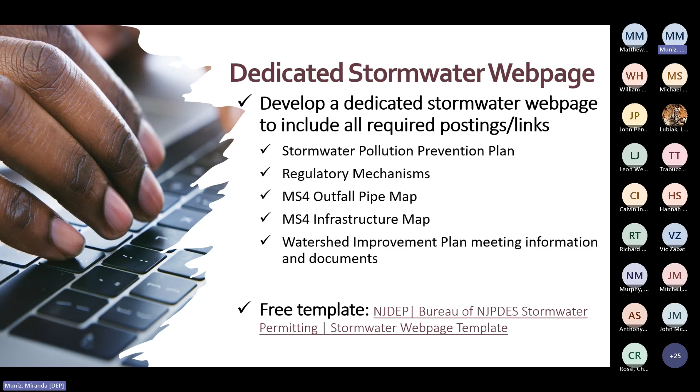Local public education and outreach. The SPC will arrange for a variety of education and outreach to the public. This is required for all permittees, not just those that operate rest areas. For highway agency permittees, we are using a 7-point system where you select at least 3 activities from the categories we describe in the permit attachment.

One activity must educate on the hazards of illicit connections and improper disposal of waste. Alternative activities can also count for this requirement as long as department approval is received prior to conducting the activity. Keep records of your activities and report them in your annual report. If you need ideas or materials, we have some available on the MS4 webpage that you can use.

Here are some highlights of Attachment A, the point system for public education and outreach activities. Here are some of the examples of activities we offer for points: designated pet relief areas, promotional item giveaway, regulatory mechanism signage, regulatory mechanism education, storm drain labeling campaign, litter cleanup campaign, report excess road salt pile program, and road salt education campaign. You can find a description of each activity as well as their associated point values in Attachment A in the permit.

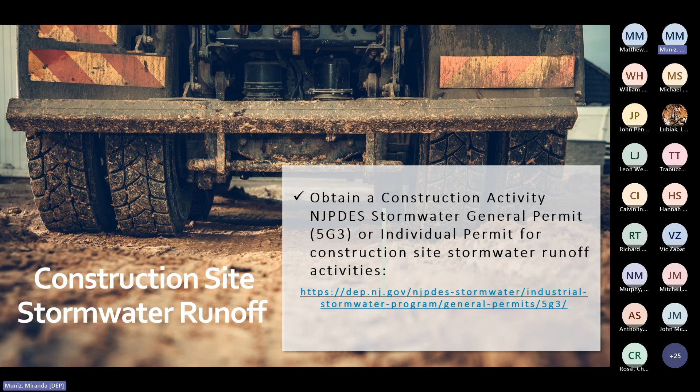Construction site stormwater runoff. The SPC must ensure that all construction projects that will disturb 1 acre or more, or are part of a common plan of development that disturbs 1 acre or more, obtain a 5G3 or an individual industrial stormwater permit before starting construction. Please note that the 5G3 permit was renewed in 2022 with minor changes. It applies to the projects undertaken by the permittee, as well as private companies and individuals.

Post-construction stormwater management in new development and redevelopment. This condition highlights the requirements related to stormwater management designs for major development projects. If you are the SPC but not the engineer, you won't need to know the technical details, but you do need to be familiar with the process. Engineers who review and approve major development projects must be different from those who design the projects. They can work at the same firm if that's something you outsource, but the person who designs the stormwater management project must be someone different than the person who reviews the design.

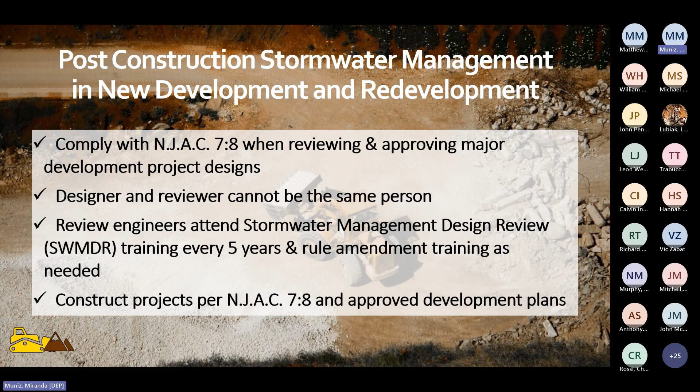Review engineers must complete the department's Stormwater Management Design Review, or SWMDR, course every 5 years to stay certified. They also need to attend a training on rule amendments if the department determines that training is warranted. We'll talk more about this when we get to the training section. You can check our webpage for the list of department certified engineers to confirm the status of the engineer for your facility. The reviewer must ensure that the projects are designed in accordance with N.J.A.C. 7:8, the BMP manual, and constructed according to the approved plans.

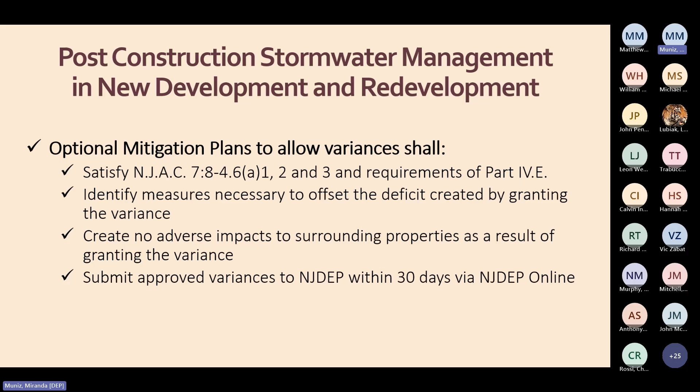Mitigation plans. If your facility wants the ability to grant variances from the design and performance standards for stormwater management measures, there needs to be a written mitigation plan that satisfies the criteria in the stormwater management rules at N.J.A.C. 7:8-4.6(a)1, 2 and 3 and identifies the measures necessary to offset the deficit created by granting the variance. Each time your agency grants a variance, you need to send a report describing the variance to the department via NJDEP Online within 30 days of the approval.

Regulatory mechanisms. Regulatory mechanisms are aimed at minimizing stormwater pollution and flooding throughout the highway agency properties, not just at major development sites. The purpose of community-wide regulatory mechanisms is to have methods in place to keep pollutants out of stormwater so it doesn't make its way to streams, lakes, and other water bodies where it can contribute to harmful algal blooms, or HABs, cause beach closings, and a host of other negative impacts. They help to keep the community clean by setting a standard for the public and ensure you have a way to punish those who violate these regulatory mechanisms.

Let's go through each regulatory mechanism briefly. Pet waste: the intent is to get people to clean up after their pets so their waste stays out of the stormwater system and ultimately out of the watershed. Highway agencies can also use this mechanism to completely prohibit pets from being allowed on highway agency property.

Wildlife feeding: the intent is to stop people from feeding wildlife, like ducks and geese, to discourage them from gathering where they can leave droppings on public property that also pollute the watershed.

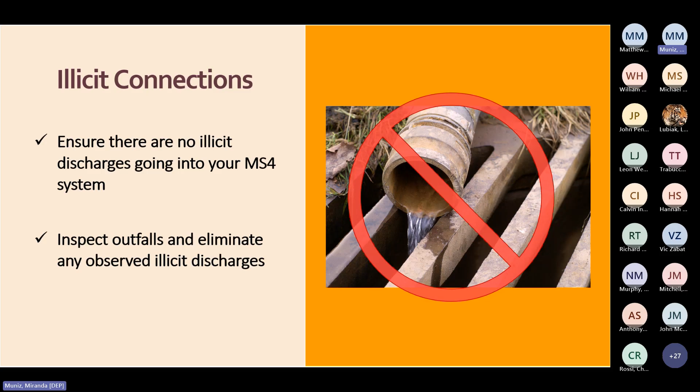Litter pickup program: all permittees must develop a litter pickup program that includes roadside cleanup of trash and debris and regular collection of refuse from litter and recycling receptacles, including those located at rest areas. You must maintain records of roadside cleanups and estimates of the total amount of trash and debris collected.

Sweeping streets provides more than just aesthetic benefits. It keeps dirt, debris, and litter out of the stormwater system where it would otherwise pollute the watershed. It helps alleviate flooding from clogged storm drains and can help reduce the frequency of catch basin cleanings.

This requirement was not changed from the last permit. You are only responsible for sweeping your roadways that you own and operate. While these are the minimum requirements, the permittee must sweep more frequently as necessary to eliminate recurring problems.

First, we have quarterly street sweeping. The permittee shall sweep, at a minimum, once every 3 months, all segments of limited access highways, including ramps and parking areas, that have storm drain inlets or discharge directly to surface water.

Triannual street sweeping: the permittee shall sweep, at a minimum, once every 4 months, all segments of streets, ramps, and parking areas that have storm drain inlets or discharge directly to surface water, but are not limited access highways.

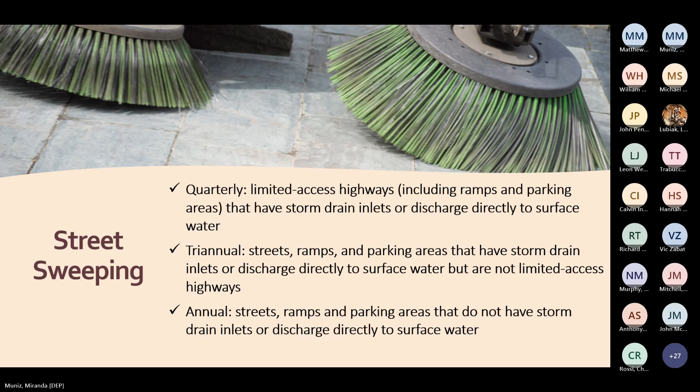On the left, we have a photo of a rest area parking lot with inlets that discharge directly to surface water, which needs to be swept 3 times a year under the highway agency permit. On the right, we have a photo of a limited access highway, which needs to be swept 4 times a year under the HA permit.

Streets, ramps, and parking areas that are owned or operated by the permittee but do not have storm drain inlets or discharge directly to surface water only need to be swept annually.

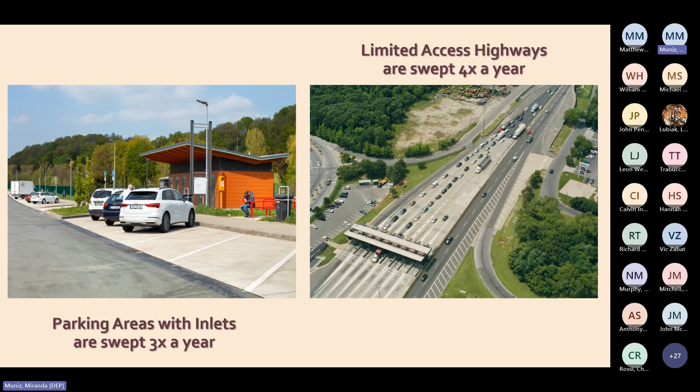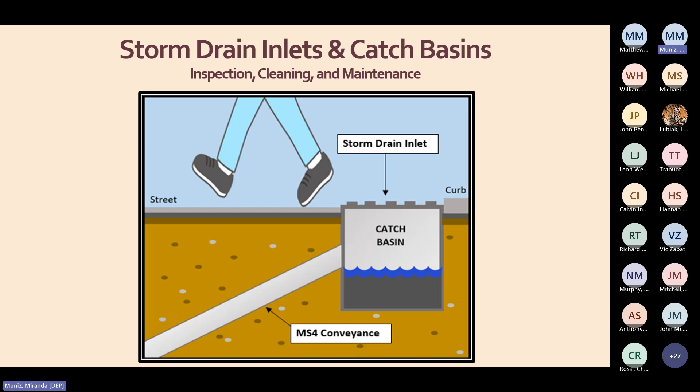Let's talk about the difference between storm drain inlets and catch basins. The storm drain inlet is the top grate that you can walk or drive over, and if it's along a curb, it includes that curbside opening. We consider the inlet to be the parts that you can see on the surface. The catch basin is below the surface, typically straight below the inlet, but sometimes further down the pipe.

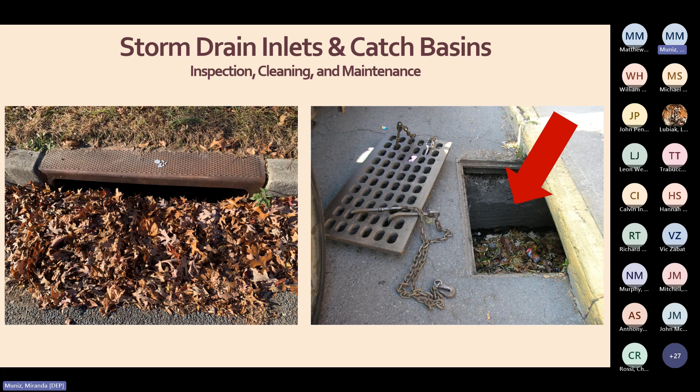New storm drain installations must have a corresponding catch basin or other BMP designed for solids collection. It can be directly below the inlet or downstream of the new storm drain inlet prior to discharge to surface water. Exemptions for this condition include storm drains built on bridges or culverts, or when additional hydraulic losses will result in unavoidable adverse hydraulic impacts.

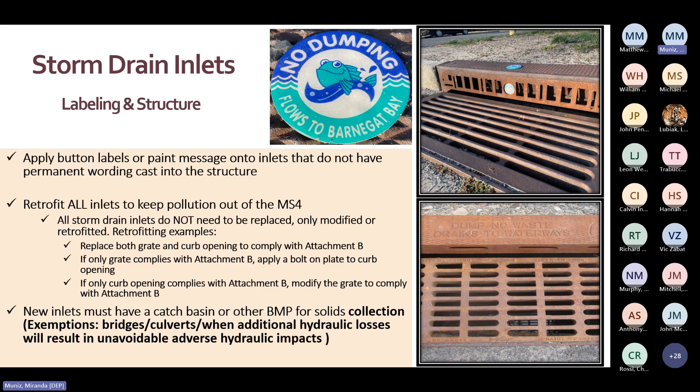So that's everything you need to know about the structure. Let's talk about inspections and maintenance for storm drain inlets. These inspections can be done by driving to each inlet and just hopping out of the truck to check if trash, leaves, branches, or other debris need to be removed, or if you see signs of damage. For this reason, we require that all permittees inspect all storm drain inlets every year.

Catch basins involve a bit more work. The inspector needs to get out of the truck, look down inside with a flashlight, or maybe lift the inlet grate to see if the catch basin needs cleaning. If the highway agency operates or maintains more than 2,500 catch basins, the requirement is to inspect a minimum of 20% of the total every year on rotation, so that all catch basins are inspected by the end of the permit cycle. If the highway agency operates or maintains less than 2,500 catch basins, they must all be inspected annually.

When it comes to catch basin cleaning, please check the manufacturer's recommendations. The EPA also has a guidance document where they advise removal of materials when the sump pit becomes 40% full.

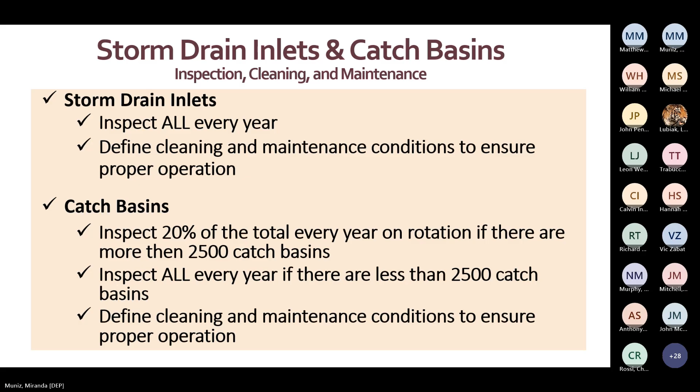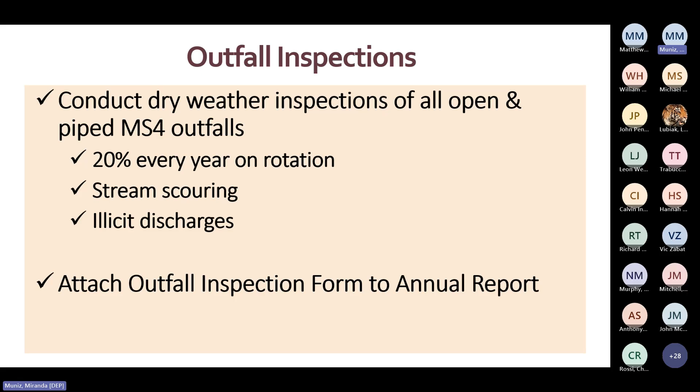Now let's talk about outfalls. For highway agencies, the requirement is to inspect a minimum of 20% of the total every year on rotation, so that all outfalls are inspected by the end of the permit cycle. The department offers outfall inspection forms on the MS4 webpage to document your findings. These inspections must include checking the overall structural integrity of the outfall, clogging, and instances of stream scouring and illicit discharges. The next two slides will focus on scouring and illicit discharges.

Scouring can present as gouging out of the stream bank, undermining the outfall structure. Scouring erodes soils, clogs stream beds, and ruins habitats. When performing inspections, note if the soil is eroding away around the outfall and if stabilization is necessary. And just so it's understood, scouring inspections are required for all outfalls, not just those that discharge to streams.

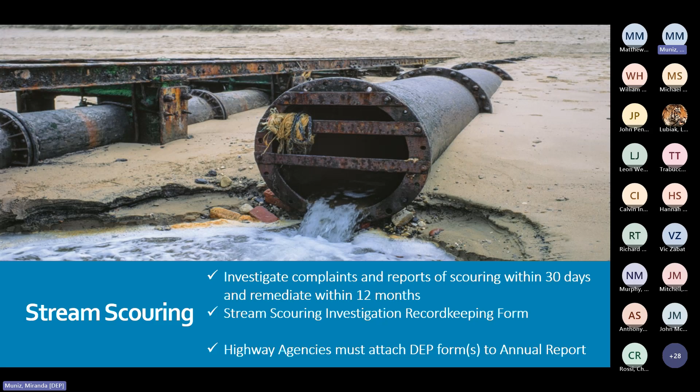All reports of stream scouring must be inspected within 30 days, and confirmed cases need to be remediated within 12 months of discovery, unless the department approves an alternative timeline. The department has a form available on our webpage to document stream scouring cases.

When you're inspecting outfalls for illicit discharges, look for instances of dry weather flow, which means a flow coming from the outfall 72 hours after a rain event. Other indicators include foam, turbidity, colored or overly fragrant discharges, and the presence of sanitary waste items.

All reports of illicit discharges must be inspected within 30 days, and confirmed cases need to be remediated within 12 months of discovery, unless the department approves of an alternative timeline. All permittees need to use the department's illicit discharge form and upload it with the annual report.

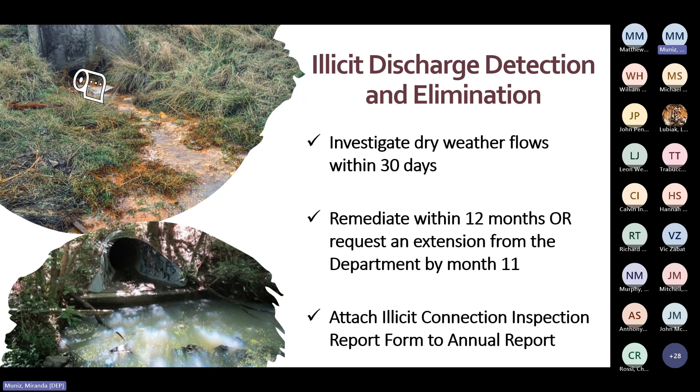Stormwater conveyance systems include any man-made feature that conveys stormwater. This typically means pipes, ditches, swales, and concrete drainage channels. This also includes cases where the structure below the inlet does not have a sump and therefore isn't a catch basin. Those situations should also be treated as conveyance and maintained as such.

This is not a new permit condition for any MS4 permittees, but what is new is that you need to describe your inspection and maintenance program in your SP3 and cover it during annual trainings of the staff who do this work. We don't specify in the permit exactly when you should do inspections and maintenance, since there's a lot of variation in conveyance systems. So please just tailor your program to best suit your system. The department has guidance available if you need it.

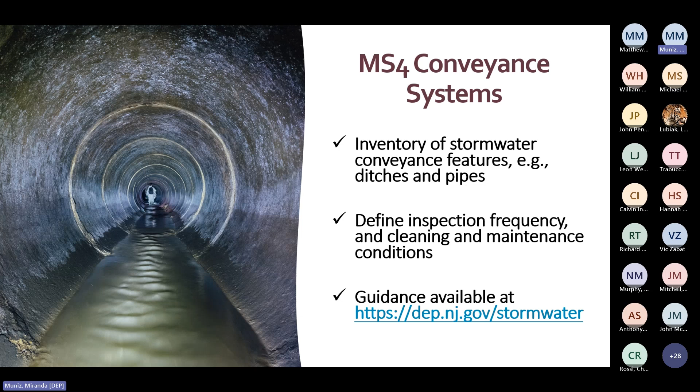So far, we've talked about inspecting storm drain inlets, catch basins, outfalls, and conveyance systems. These are the most common components of stormwater infrastructure, but we know that there are other features our permittees use, so we've created this catch-all condition. It applies for anything else you use to manage stormwater, things like stormwater basins, manufactured treatment devices, etc.

For anything that falls in this miscellaneous category, explain what it is and define the conditions that warrant cleaning and maintenance per the approved maintenance plans. If an approved plan is not available, create one by following the department's Best Management Practice Manual or Maintenance Guidance, both available on our website.

If the feature in question is not included in the department's BMP manual or guidance documents, conduct inspections at least 4 times each year and after each rainstorm exceeding 1 inch of total rainfall. If any of the infrastructure is found to be not functioning properly, maintenance and repairs must be done no later than 90 days from discovery.

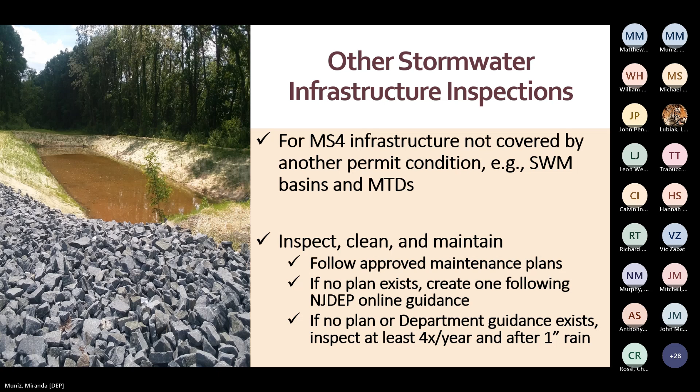If you use herbicides to kill weeds, the SPC must ensure that they're being applied properly to prevent it from being washed into waterways and causing erosion from devegetation. Avoid spraying herbicides on or near storm drain inlets and on steep slopes, and only spray in areas where it's unsafe or impossible to mow. When spraying around structures like telephone poles, keep it within a 2-foot radius.

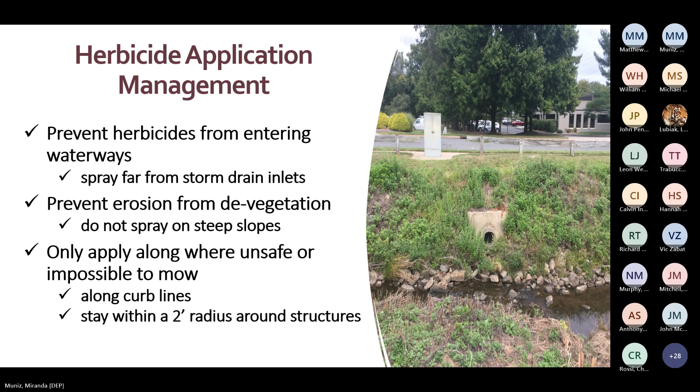The management of excess de-icing material is not related to how you store your salt supply at the maintenance yard. We will talk about proper storage later. This condition is aimed at cleaning up the little piles that are sometimes accidentally left behind in parking lots or along roadways where the driver starts up or stops the spreader. Within a few days after the storm, please check where your spreaders have worked to clean up any piles you find. This way, the materials don't wash into nearby waterways.

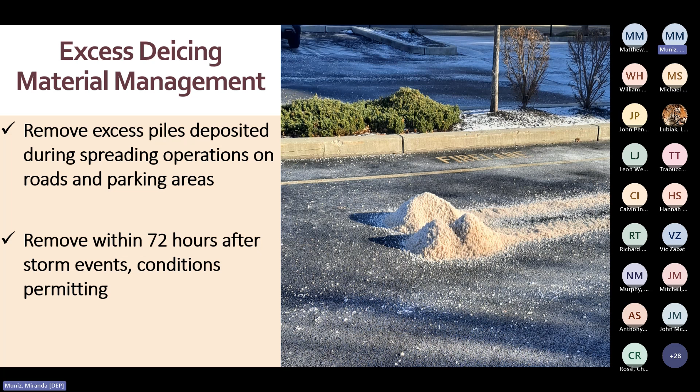Grass clippings, dead leaves, and tree branches that get into the MS4 have the potential to clog the conveyance system and cause flooding. These materials also increase the level of nutrients and total suspended solids in the receiving waters, which may result in harmful algal blooms and interfere with the aquatic habitat.

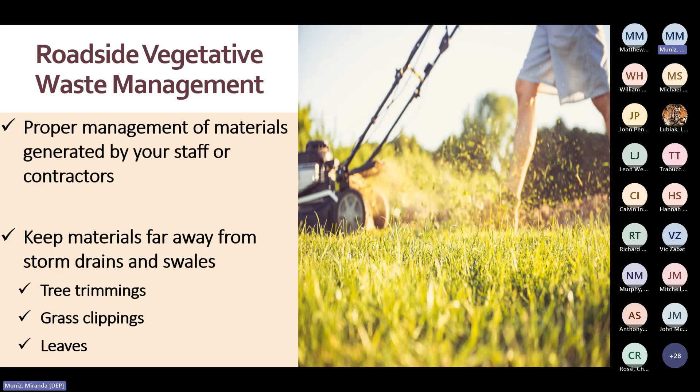This permit condition is intended to ensure that your staff are handling this type of vegetative waste in a way that keeps it out of the stormwater system. For example, you may choose not to bag grass clippings. It's okay to leave them in place. If you collect or clean up the vegetative waste, explain how you keep materials out of the stormwater system.

There are a series of exemptions to this permit condition. If a tree is a hazard, you may remove it without needing to replace it. Hazard trees are trees that are diseased, infested by insects, dead, or dying. It is also fine to remove trees that obstruct traffic signs, pedestrian walkways, or safe passage of vehicles. And if you have a concern about the condition of a tree and an arborist declares that it's a threat, those are fine to remove too.

For an example there, maybe you have a multi-trunk tree with codominant stems and the trunks are cracking apart. The tree is at risk of falling during storms and would therefore be a hazard tree and can be removed without replacing it.

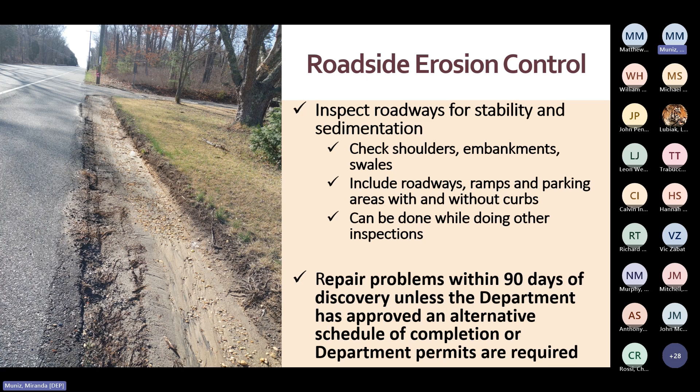The permittee must ensure that refuse containers and dumpsters that are outdoors or exposed to stormwater are managed as follows. They must always be covered with a tarp, lid, or under a permanent structure to prevent contact of waste materials with stormwater, unless actively being filled or emptied, and they must be leak-proof to prevent the discharge of leachate from the contents of the container. Temporary demolition containers or containers that hold large bulky items like furniture do not need to be leak-proof as long as they do not contain putrescible waste. Litter receptacles and refuse containers at industrial facilities authorized to discharge stormwater under a valid NJPDES permit do not fall under this permit condition.

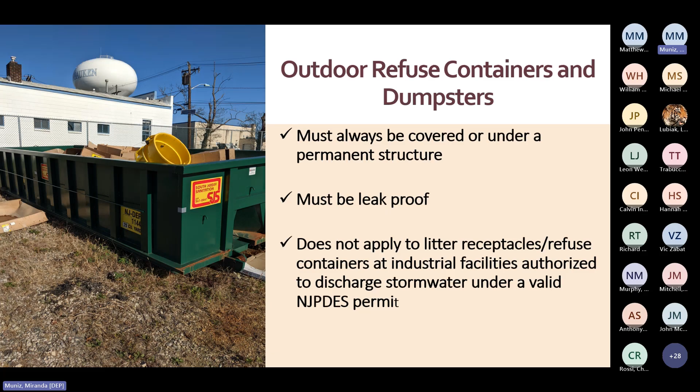Hello, my name is Louisa Lubiak, and I'm the MS4 case manager for Hudson, Hunterdon, Mercer, and Gloucester counties. Let's continue the presentation with maintenance yard requirements, followed by training requirements, and then we'll move into mapping assistance.

As the SPC, you are responsible for making sure that operations are being conducted in compliance with your MS4 permit at all maintenance yards and ancillary operations, and that all good housekeeping BMPs are being followed. This applies to all permittee-owned or operated yards for outdoor storage and maintenance of vehicles, equipment, materials, and supplies. Ancillary operations include places like fleet or maintenance shops, impound yards, permanent and mobile fueling locations, salt and sand storage locations, snow disposal areas, etc.

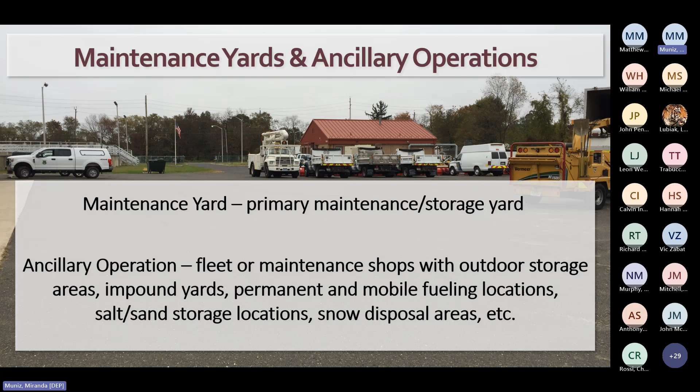There are specific BMPs that must be implemented at each maintenance yard and ancillary operation, so let's go through them now.

Site inspections. Usually, DPW or maintenance supervisors will designate someone to inspect each yard, or will do this themselves. The inspector will note the conditions and document any work that is done or needs to be done to fix problems.

Inventory list. Keep a list of materials and machinery that are exposed to stormwater, since they are a potential source of pollutants.

Container labels and storage. Label all containers so they are clear and easy to read. Protect containers from being damaged or spilled, making sure they are tightly closed when not in use. Containers stored outside should be covered and set on a spill platform, clean pallet, or in an area graded or bermed to prevent stormwater run-on.

Spill kits. Keep a spill kit near any liquid transfer areas and make sure it's protected from the elements. Be sure to use dry cleaning method only, for example, kitty litter or sawdust, and sweep it up for proper disposal afterwards.

Bulk liquid storage. Some of you may have above-ground tanks of fuel, used motor oil, or liquid de-icers. Be sure to surround new and existing petroleum storage tanks with a secondary containment barrier, such as a spill containment dike, to contain any drips and spillage. This is preferable over just a double-walled tank, as secondary containment areas are intended to capture spills during operations. Although not required for existing liquid de-icing and anti-icing tanks, be sure to include a secondary containment barrier when installing any new brine storage tanks.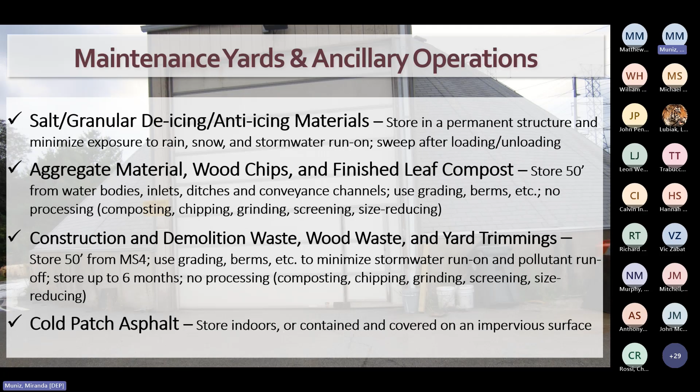Cold patch asphalt. Store indoors or contained and covered on an impervious surface. Street sweeping and storm sewer cleanout materials storage. Keep these materials in a leak-proof container or stored on an impervious surface and covered with a waterproof material and contained to prevent materials from contaminating stormwater. Materials may not be stored longer than 6 months, or the site would need to apply for a solid waste permit.

Scrap tires. Store tires in a covered container or enclosure. If a covered container or enclosure is not available, tires may be stored on an impervious surface and covered with a waterproof material. Inoperable vehicles or equipment. The designated storage area must be at least 50 feet from storm drain inlets. Use tents, covers, and drip pans under leaking vehicles and check them during monthly site inspections. And finally,

wood waste. As mentioned on a previous slide, storage of wood waste, leaves, and compost is still covered under the MS4 permits. However, all composting, chipping, grinding, screening, or size-reducing activities, even if it is just once a year, are not covered under MS4 permits and require a separate industrial stormwater permit called the Wood Waste Recycling and Leaf Composting General Permit. If you are performing any of these activities at any of your sites, please reach out to your MS4 County Case Manager to determine if you're eligible for coverage under the WRC permit or if it requires an individual industrial stormwater permit. You can also visit the link on the slide for more information.

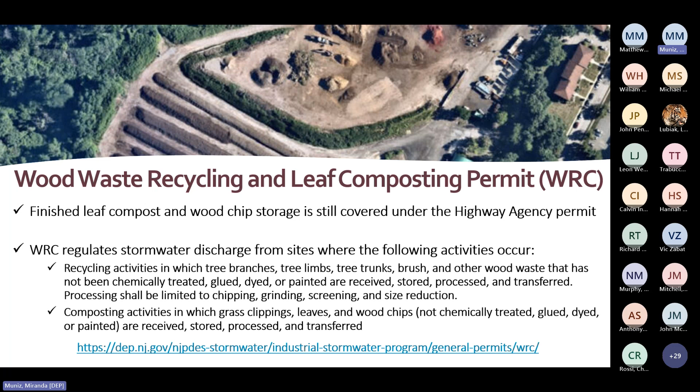As the SPC, you are responsible to make sure everyone is getting the right training at the right time. You are also responsible for making sure training records are kept to demonstrate compliance with the training requirements. Let's go through each type of training requirement. Stormwater Program Coordinator Training. Yes, this is the training we're doing right now. We developed this training to make sure that the permit is interpreted and implemented correctly and consistently throughout the state. All SPCs are required to attend this training once every permit cycle, so about every 5 years. You are welcome to attend more frequently than this if you want a refresher, and you may also invite other staff who work in your stormwater program who want to attend.

During training sessions, we will be monitoring attendance and keeping records to make sure the SPC for every highway agency has been trained. If you change jobs or retire, someone at your agency needs to let us know who will replace you within 30 days. Your replacement must attend the next available live session. We plan to hold them twice each year. We suggest new SPCs watch the recorded training session posted on the MS4 website as an introduction to the requirements.

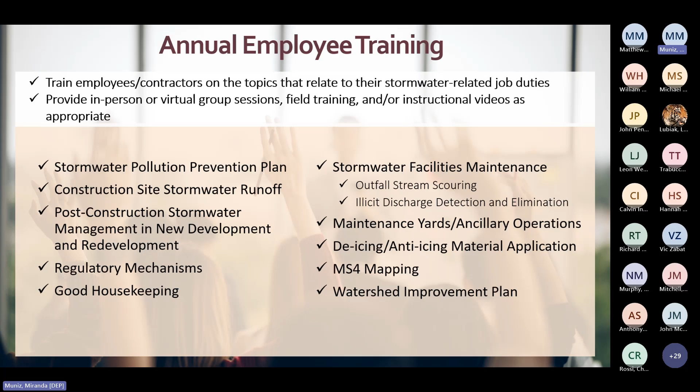You most likely don't have a training department, so a discussion of these topics should be conducted each year, led by the most knowledgeable person you have on each topic. For example, street sweeping training should probably be conducted by the DPW director. If you have a code enforcement officer, that person may cover the regulatory mechanisms. This can be done in a group setting or one-on-one, in the field, in the office, or on the computer, however you see fit. The SPC is responsible for ensuring that all required training is held and all appropriate records are kept in accordance with the permit.

De-icing and anti-icing material application training. With the 2025 permit renewal, you are now required to develop a training program on the application of de-icing and anti-icing materials to make sure that all individuals, including employees, contractors, consultants, vendors, or volunteers, that apply de-icing and anti-icing material on your agency's roadways, ramps, and parking areas complete de-icing and anti-icing material application training at least once per year. The training should emphasize procedures specific to stormwater pollution prevention, as this training is about more than just the layout of routes and the operation of machinery.

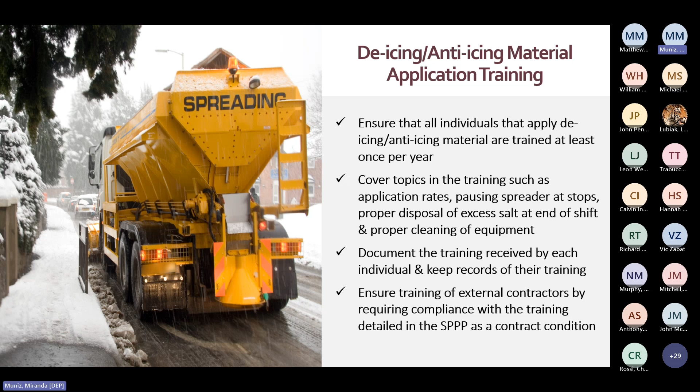Make sure you document the training received by staff, including each participant's name, title, signature, dates of training, and instructors' names, and keep these records on file in your SP3. Also, make sure that external contractors, consultants, and vendors are properly trained by requiring compliance with the training detailed in your SP3 as a condition of the contract.

Stormwater Management Design Reviewers. The SPC must ensure that those engineers who review and approve designs for major development projects on behalf of the highway agency attend the department's Stormwater Management Design Reviewer training, which we call SWMDR. The purpose of the training is to ensure that projects are designed in accordance with the rules, so that once a project has been constructed, there is minimal impact on stormwater quality and runoff quantity or flooding.

This is a technical course which will cover the most current stormwater management rules, municipal stormwater management plans, municipal stormwater control ordinances, mitigation plans, and the department's BMP manual. This course is approximately 12 hours in length, broken up over 4 half-days, and is required every 5 years. The department has a list of past course attendees and certification dates, so you can check the status of your agency's engineers. If there is an amendment to the stormwater management rules, additional training may be required.

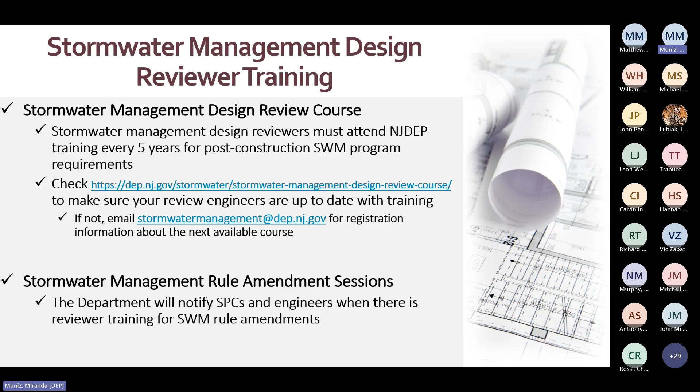If the department determines that training sessions are necessary, engineers must attend within 12 months of adoption of any amendments. Rule amendment training sessions will be announced by the department on the website and via email to all SPCs and to engineers who have attended previous SWMDR courses. If you have attended SWMDR and your email address changes, please let us know.

All highway agencies should have already mapped and submitted their stormwater outfall pipes by December of 2020 and submitted a stormwater facilities map by January of 2023 as required by the 2020 permit. This map included permittee-owned or operated stormwater facilities, such as storm drain inlets constructed after January 1, 2020, stormwater management basins, groundwater discharge points, manufactured treatment devices, green infrastructure, and property boundaries of maintenance yards, ancillary operations, rest areas, service areas, roadways, and thoroughfares.

With the 2025 permit renewal, highway agencies will now need to map all of their owned or operated stormwater infrastructure. This means mapping everything that collects, treats, or conveys stormwater, including interconnections, manholes, stormwater conveyances, pump stations, and streets, ramps, parking areas, and thoroughfares. This also includes the mapped property boundaries of rest areas, maintenance yards, and other ancillary operations. Since highway agency permittees should already have their outfall pipe and stormwater facilities mapping data, the MS4 infrastructure map requirement for this permit shouldn't be a huge lift.

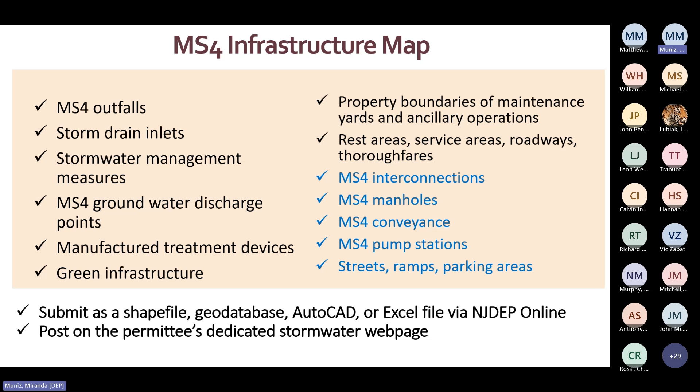The infrastructure map must be reviewed annually or more frequently as necessary, and updated to include the location or attributes of any new or newly identified MS4 infrastructure. The map must also be posted on a dedicated stormwater webpage when it is complete. A map in PDF format will suffice, but we've seen some permittees include a link to an interactive stormwater map as well. It's important to note that we require that all permittees include certain attributes in the electronic data that is submitted. We'll go through each stormwater feature and their required attributes.

Outfalls. The required attributes that must be included in your data are the type of outfall, such as piped or open channel, and the name of the receiving surface water body that the outfall is draining to, such as the Delaware River or any other river or tributary. If your outfall drains to a ditch, an infiltration basin, or groundwater, then it is not considered an MS4 outfall and should not be included in this layer. These points would be mapped as a groundwater discharge point instead.

Groundwater discharge points. The required attribute that must be included in your data is the type of groundwater discharge point. The two most common types are a constructed infiltration BMP, such as an infiltration basin or a sump inlet, and an overland flow area. Interconnections. The required attributes that must be included in your data are the type of interconnection, such as a pipe or open channel, and the upstream and downstream entities. For example, if your system discharges into a neighboring municipality, then the upstream entity is you, and the downstream entity is the municipality, and vice versa if you receive stormwater discharge from another MS4 system.

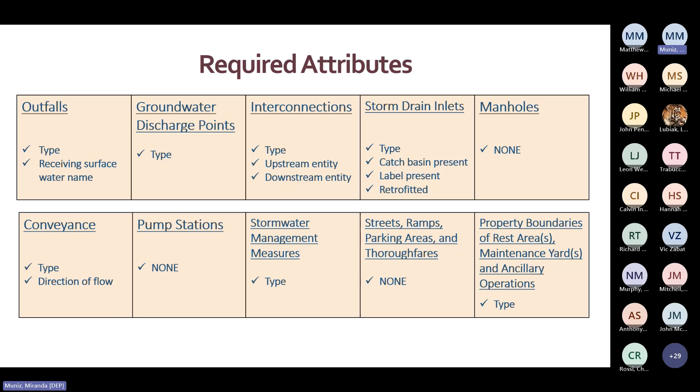Now that we've gone through the mapping requirements, let's move on to discuss how the department has created tools to help permittees complete their mapping requirements, starting with our free mapping tool. The department previously created a geodatabase template and associated data dictionary for 7 stormwater feature classes required to be mapped in the 2020 Highway Agency permit. We realize that not every permittee operates in the same manner or has the same technological capabilities, so this geodatabase template was made available over several different collection methodologies to suit the needs of all permittees.

This includes a shared editing map within ArcGIS Online that can be accessed on desktop computers, smartphones, or tablets. We also created a downloadable geodatabase template for permittees who are familiar with and currently using ArcMap or ArcPro with their own licenses. We are working to update and modify the ArcGIS Online shared editing map and the geodatabase template to account for all the new stormwater features required to be mapped for the permit renewal.

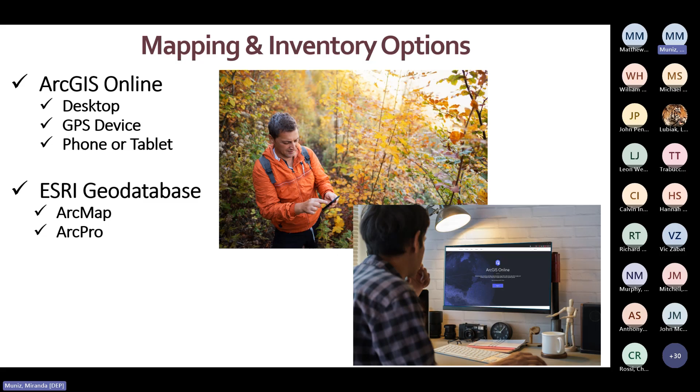As I mentioned, the first method created was a shared editing map in ArcGIS Online. This program allows users to collect points and associated information on a tablet, a smartphone, or a desktop computer. The department secured a pool of free-to-use licenses for our permittees, and they are available upon request. Additionally, if any permittees already have their own ArcGIS license and would like access to our shared editing map, we are able to invite you to edit the map, so please reach out to your county case manager to get that set up.

Data that is collected will be stored in our database and can be viewed publicly and downloaded at any time. The desktop version of ArcGIS Online is a great way to electronically digitize points from the comfort of your office using an old PDF or tax map. Let's quickly walk through how to access our shared editing map in ArcGIS Online. Your first step will be to navigate to ArcGIS Online using your web browser. This is what the splash screen looks like.

Next, sign in using the username and password assigned to you with your department-provided license or your own ArcGIS Online license, if you have one, and were invited to the editing group. You will then need to access the Groups tab once you have signed in to see a list of all maps that you have access to. This is where you will be able to view and then make edits to the MS4 infrastructure editing map.

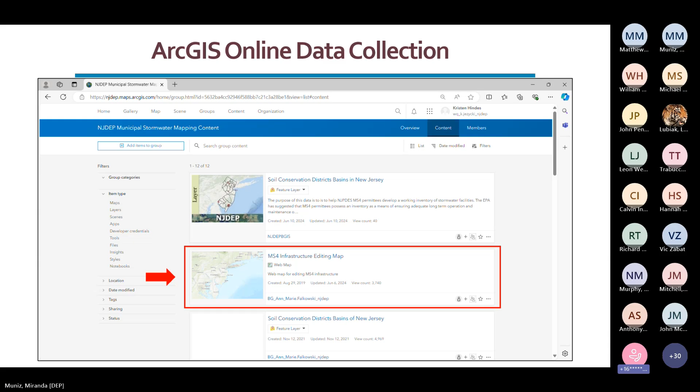Once you scroll down, click on the View All Group Content button at the bottom, which will bring you to this screen where you will find the MS4 Infrastructure Editing Map. Then click the link to the MS4 Infrastructure Editing Map. The main page of this map is where you are able to see details along with other information regarding the map. To start editing, you will open the map by clicking on the Open in Map Viewer button.

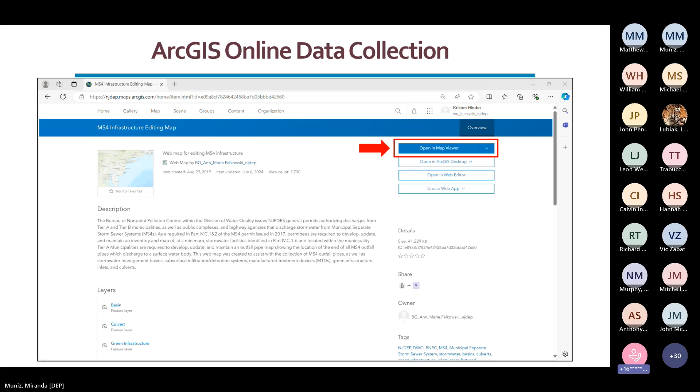This is what the map looks like when you first open it. As you scroll in, you will start to see data points populate. The map is interactive, so if you see points already mapped and are interested in viewing them, you can click on a point and a box will appear detailing the point's associated attributes.

I want to point out some of the important buttons here on the main map screen. You can click the magnifying glass in the lower right corner to use the search function to find your current location or to search for a specific address, and the search function will zoom you right into that location on your map. This button on the top left-hand side that looks like a stack of squares will show you the different layers that are currently on the map for viewing.

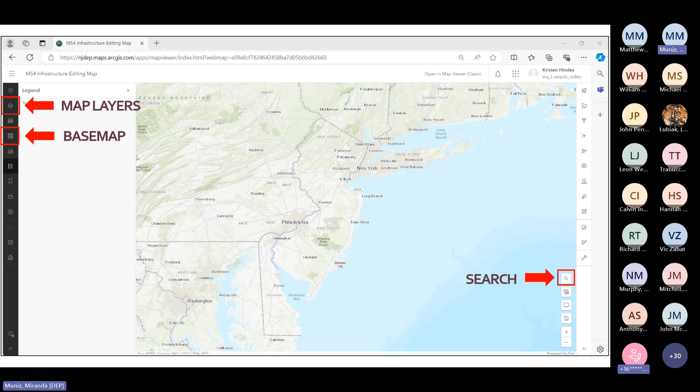Click the 4 squares on the left-hand side if you want to change the base map on the map. Typically the imagery base map is the most helpful, especially if you are plotting points using a tax map or knowledge from previous field visits. When you are ready to start mapping data, click the Edit button on the lower right-hand side. It looks like a pencil and paper.

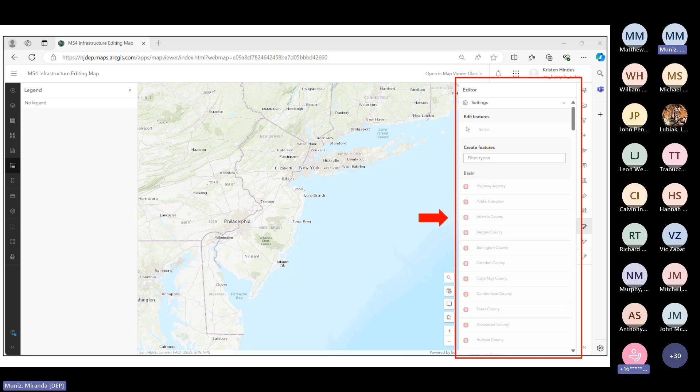Now I'll do a quick step-by-step walkthrough of how to plot a point. To begin, you will click the Edit button to start mapping. It will open a menu on the right side, where you will be able to choose the correct feature class type that you are trying to map, like outfall or inlet, etc. Scroll until you find the correct stormwater facility type and then correct county. For example, if you are trying to plot an inlet within Atlantic County, you would click here.

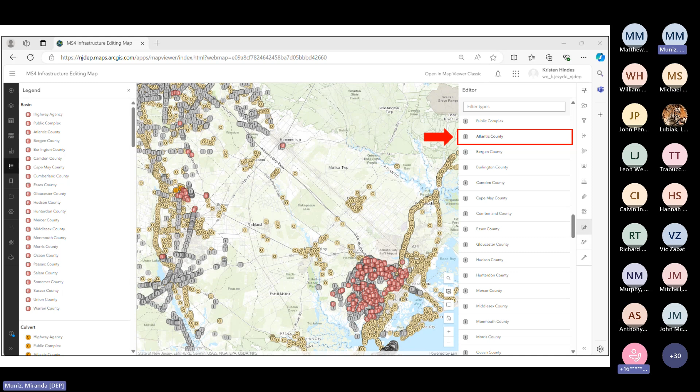Currently, the tool has feature classes for culverts, basins, outfalls, inlets, etc., and is being updated to account for the changes to the mapping requirements in both the Tier A and public complex renewals. The icons are different for each feature class. Once you click the correct feature class, this will bring up a crosshair with the point, and you will click on the correct location on the map to plot the point.

The menu on the right-hand side will change to display the different attributes you can fill out for the designated point. This will include discharge code, facility name, and others that are specific to each feature class, like type of outfall, or if a storm drain inlet is labeled. Most of these attributes will have drop-down boxes, so it is easier than entering manually.

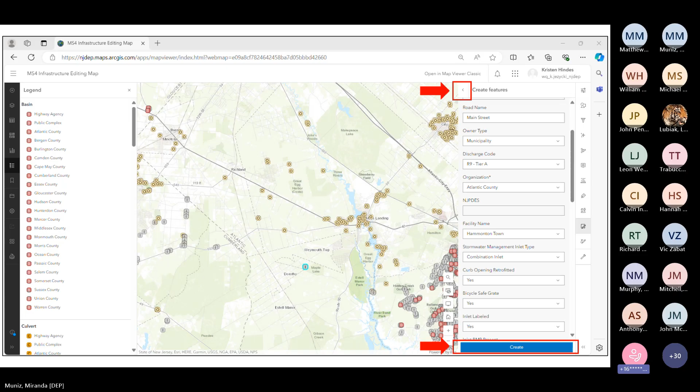Once you have finished adding all attributes, click the blue Create button at the bottom of the menu. If something is incorrect before you click Create, you are able to make changes or discard your edits entirely by hitting the back button at the top of the menu. If you realize after you hit Create that there is an error in the point or attribute, click on the point on the map, which will highlight it in blue. This will open a box showing all of the point's associated attributes, and you can make changes by clicking the Edit button at the top.

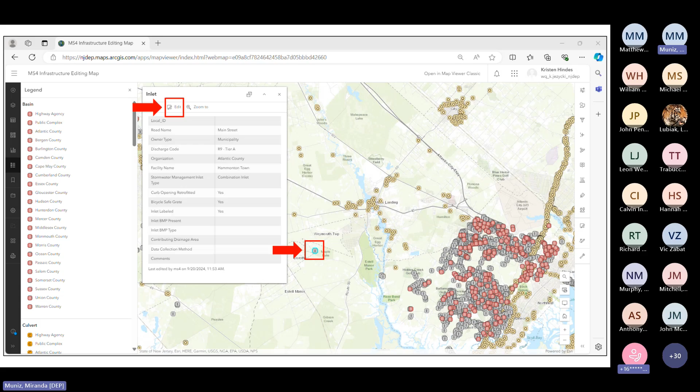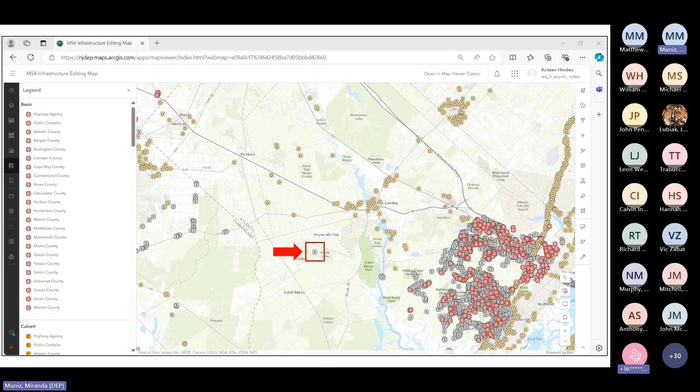However, we don't allow users to delete points to avoid accidentally deleting other people's data. If you plotted a point in error and need to delete it, please add a comment telling us to delete it, and we can take care of that on our end. As you can see, the point has successfully been plotted where we wanted. Repeat this process as many times as necessary to map all of your stormwater facilities.

As I mentioned, our shared editing map can be accessed on desktop computers and mobile devices as well. The app used for collecting points through ArcGIS Online on a mobile device is called ArcGIS Field Maps and can be accessed through both the Google Play or Apple Store. Some of you may know the previous version as Collector, but Esri has since transitioned to using this new Field Maps app. The app itself is free to download and use, and once a license is obtained from the department, you can begin mapping. This method is the best way to collect new data points out in the field.

Once downloaded, the user can collect points by using the mobile device's GPS or by manually placing points using the background aerial. When a point is placed, a list of descriptive attributes will show up and can be filled out. This helps in determining things such as the type of basin or MTD and the ownership of the facility, which is important when conducting maintenance. Most fields have drop-down menus and make it easy to fill out and less time-consuming than typing out each attribute in the field. Let's do a quick walkthrough of how to log in to Field Maps to access our shared editing map.

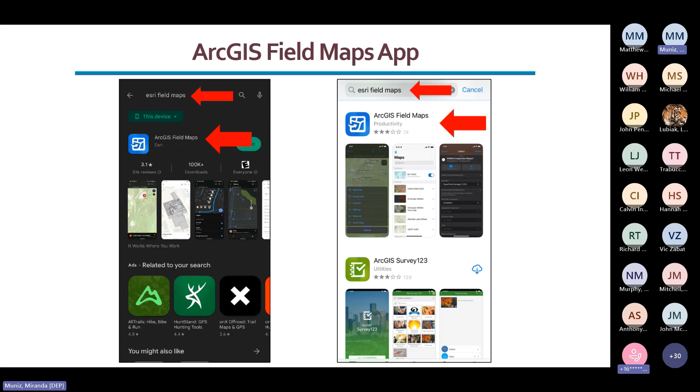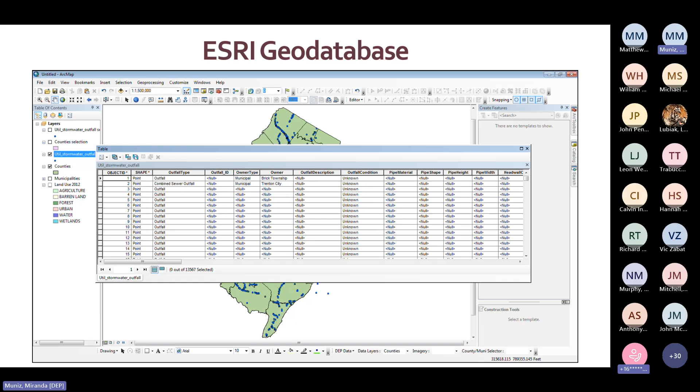While the two previous options I showed you provide automatic electronic submission, you will need to upload your geodatabase files via NJDEP online to satisfy the electronic submission requirement.

In summary, NJDEP initially created a database and data dictionary for the stormwater infrastructure features required to be mapped by MS4 permittees. It is currently being updated to account for new mapping requirements in the 2023 Tier A, 2024 Public Complex, and 2025 Highway Agency permits. The data dictionary was made available over several different collection methodologies to suit the needs of all permittees. Existing data can be accessed via NJDEP Open Data. The department is willing to provide assistance in the form of in-person training and by answering any questions you may have. Please reach out if you need any assistance along the way.

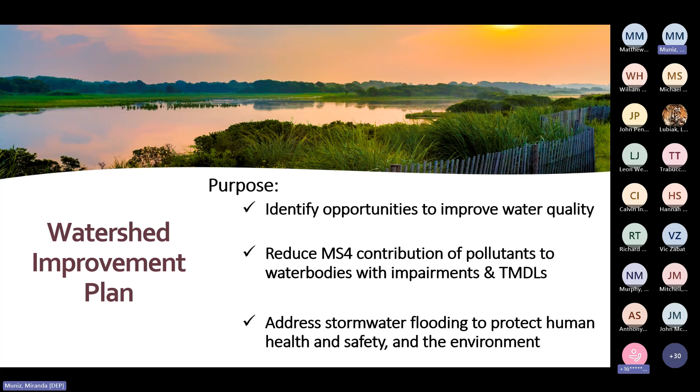Before going further into the requirements of the WIP, let's look at the current water quality concerns within New Jersey. We'll first go through some definitions and examples of what HUC-14s, TMDLs, and water quality impairments are, and how these are all related to stormwater.

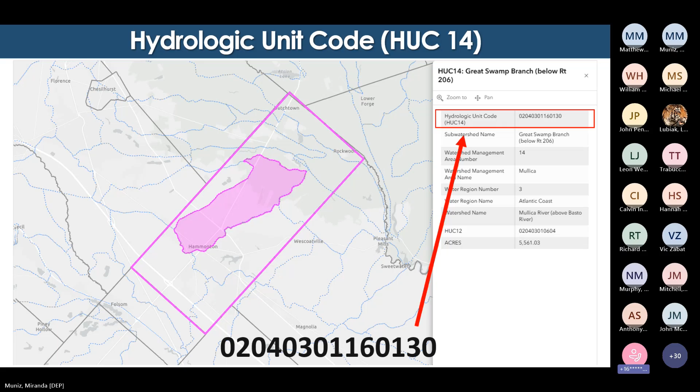Before a TMDL is developed for a pollutant, it is likely that this pollutant and water body will be designated as impaired first. Every 2 years, New Jersey is required to submit a water quality assessment report under Section 303D of the Clean Water Act, describing the condition of waters within the state. These reports include water quality information on rivers, lakes, estuaries, coastal waters, and an analysis of the extent to which waters are meeting the current water quality standards. Waters are assessed as impaired when an applicable water quality standard is not being attained. Impaired waters will require a total maximum daily load, or a TMDL, or alternative restoration plan to reduce pollutant loadings and restore the water body. Listed here are the parameters related to stormwater that New Jersey waters are impaired for.

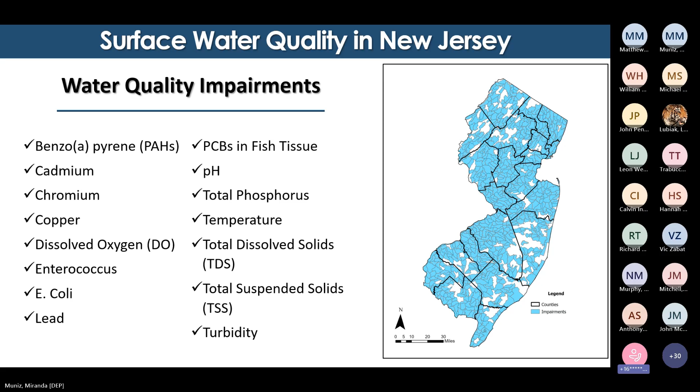So next up, we have TMDLs. A TMDL, which is short for total maximum daily load, is the calculation of the maximum amount of a pollutant allowed to enter a water body so that the water body will still meet water quality standards. A TMDL determines a pollutant reduction target and allocates load reductions necessary to the sources of the pollutant. This will result in a report or a plan to address the pollutant parameter for the specific water body.

Each pollutant causing a water body to be impaired or threatened is referred to as a pollutant parameter, and typically a TMDL is developed for each pollutant parameter for an affected water body. For example, if one water body is impaired or threatened by 3 pollutants, 3 TMDLs will be developed for the water body. However, in other cases, a single TMDL document may be developed to address several water body and pollutant parameter combinations.

So who is responsible for developing these TMDL documents? As a general matter, each state is responsible for developing TMDLs and submitting them to the EPA for approval. EPA then reviews under the Clean Water Act and either approves or disapproves the TMDL.

On the slide, you can see a full list of pollutant parameters related to stormwater that New Jersey has developed a TMDL for. You can also see that TMDLs have been developed for a majority of the subwatersheds in the state.

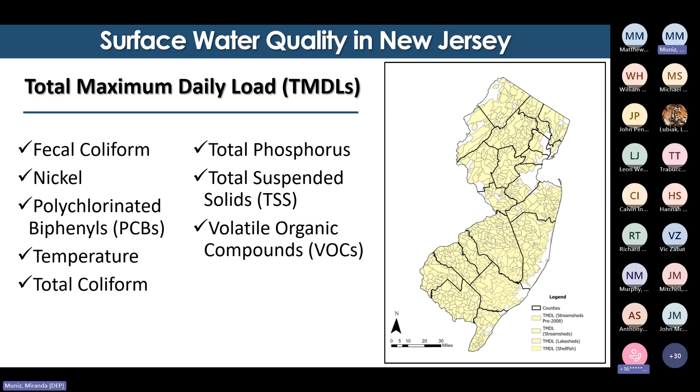The map here shows TMDLs and water quality impairments by subwatershed across New Jersey. Areas where there are water quality impairments, but a TMDL has not yet been developed, are represented in blue. Areas where TMDLs have been developed are represented in yellow. And the green portions of the map represent areas where both a TMDL and an impairment are present.

As you can see, at least a portion of every municipality in New Jersey has an impairment, a TMDL, or more often than not, both.

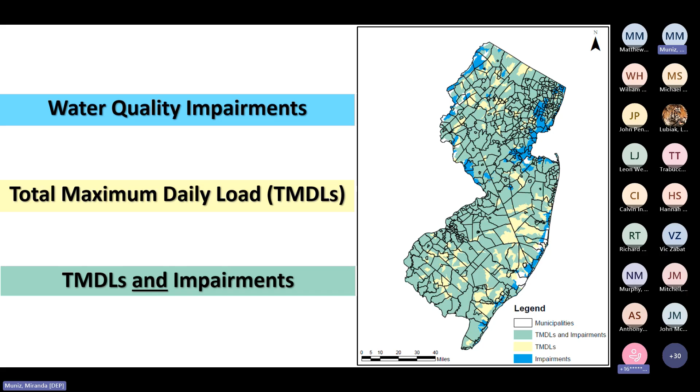It is very common for one subwatershed in New Jersey to be impaired for many parameters related to stormwater. So let's go back to our example of the Great Swamp Branch below Route 206. There's a TMDL developed for total coliform to address shellfish impaired waters. And this subwatershed is also impaired for both pH and nitrate.

Here I'm going to highlight some common pollutants related to stormwater in New Jersey, along with some of their sources. So wildlife, pet, and human waste contribute to bacteria pollutants such as fecal and total coliform and E. coli. So if you manage a rest stop, for example, you may want to keep an eye out for these parameters.

Fertilizers, leaf litter, and other vegetative waste contribute to increasing total phosphorus, nitrate, dissolved oxygen, and pH. This is why it's important to enforce certain good housekeeping measures, such as herbicide application management and vegetative waste management.

Runoff from impervious surfaces, roadside erosion, road salt, and leaf litter contribute to increases in TDS, TSS, and turbidity. Vehicles, asphalt, and building materials contribute to increases in metals, PCBs, and VOCs. And finally, deteriorating pipes can contribute to the increase of lead and copper in waterways.

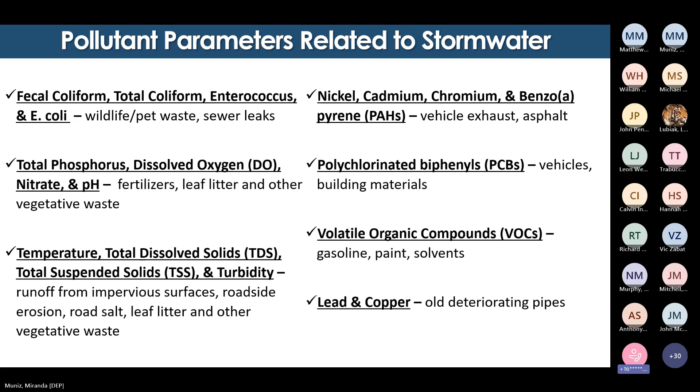The development of the plan is divided up into 3 phases. The first phase is due by January 1st, 2028, and the goal of the first phase is just to inventory all stormwater-related information, which will then be used to inform what is likely contributing to the water quality and quantity problems and where improvements could be implemented.

That will then lead us into phase 2, which is due by January 1st, 2029. And the goal of the second phase is to evaluate the information that was gathered in phase 1 to determine what potential improvement projects can be implemented for both quality and quantity concerns.

The third phase, due by December 1st, 2029, has a goal of selecting which of the potential quality and quantity improvement projects from phase 2 you will implement and on what schedule you will implement it.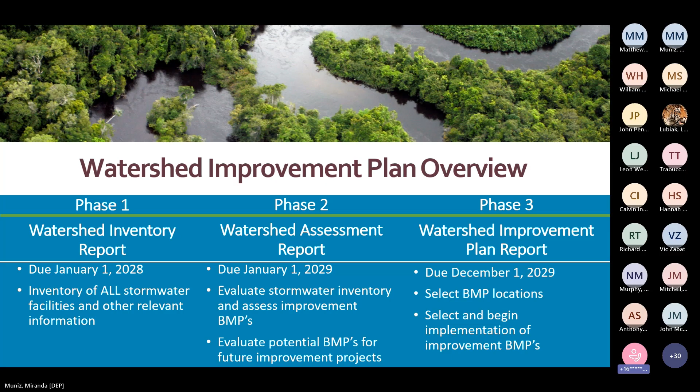So let's take a deeper look into phase 1 of the WIP. Phase 1 will involve multiple staff members and will be closely related to the MS4 infrastructure map that is also required to be submitted on the same date.

This step will involve adding just a few more data sets to the MS4 infrastructure map that we discussed earlier, analyzing department available data related to stormwater, and summarizing all of the required information in a narrative report.

While collecting MS4 infrastructure data, permittees may want to consider collecting at the same time the additional data required by the WIP, such as the drainage areas for each outfall or groups of outfalls, the drainage areas for each interconnection, and the areas that are prone to MS4 related flooding.

Next, you'll need to analyze and summarize the rest of the subwatershed information from the department's available data. This will include looking at the receiving surface water bodies for all outfalls or groups of outfalls, the water quality classifications for all the receiving water bodies. This will show you if there are any FW2 non-trout, pinelands, or Category 1 streams within your subwatersheds.

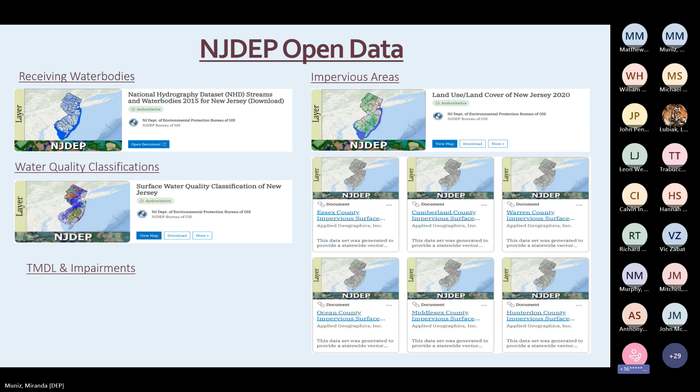This report will be created by using the mapping from phase 1 to identify potential water quality and quantity improvement projects targeting TMDLs and impairments in each subwatershed. The report will also need to include an estimate of the reduction of pollutants, a summary of feedback from public sessions, an estimate of funding needs, and a tentative implementation schedule.

The permittee needs to post the watershed assessment report on its dedicated stormwater webpage and announce a 60-day public comment period.

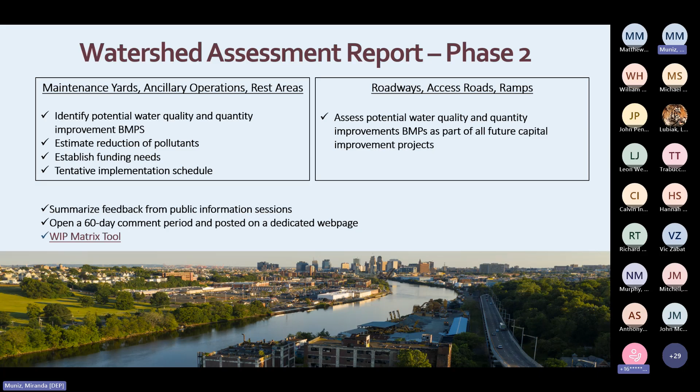So phase 3, the final plan, will take the information presented in phase 2's report, which was public noticed, and evaluate those public comments, the cost, funding, etc. It will also identify which projects are to be implemented, including proposed timelines and expected results. This report will need to include a summary of project locations and expected load reductions. It will also include the rationale behind the chosen projects and plans to incorporate other regulatory requirements, implementation schedules, and costs.

The watershed improvement plan will also need to be reviewed and updated when necessary, based on the biennial review of revisions to the impairments of the permittee's water bodies based on the department's integrated report and newly adopted TMDLs, as well as any other layer updates.

So we do have a draft WIP template, including guidance material for permittees to use. This way, all WIPs are developed statewide following the same format to make it easier for the public and the department to review and compare. You could check out our WIP webpage to see what is posted.

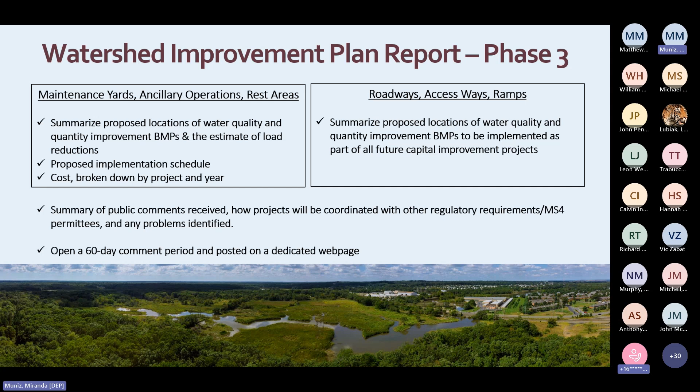You may decide now or after the phase 1 mapping and inventory has been completed that you want to combine your improvement efforts with any of the following: towns, other MS4 permittees, other types of permittees, or even other third parties such as watershed groups.

This collaboration is completely supported by the department. However, to ensure no one else speaks for you, any regional WIP collaboration would need to be endorsed in writing by each participant and specifically state which part of the HUC 14 the regional WIP will apply to and what specific projects and responsibilities will be undertaken by each. The regional WIPs will need that extra level of detail to make sure there is no misunderstanding between entities and/or the department.